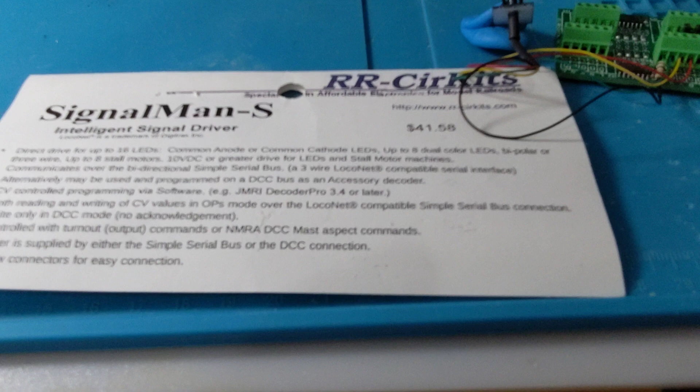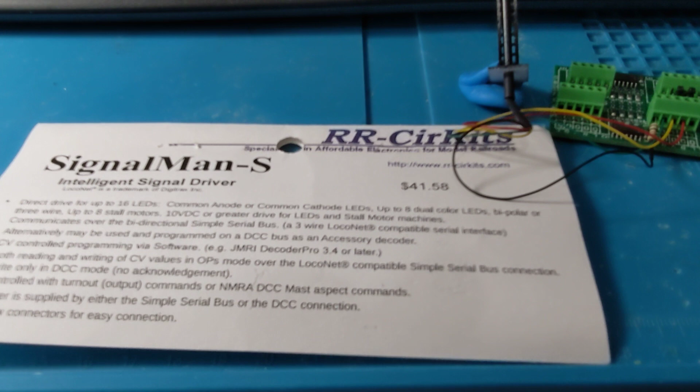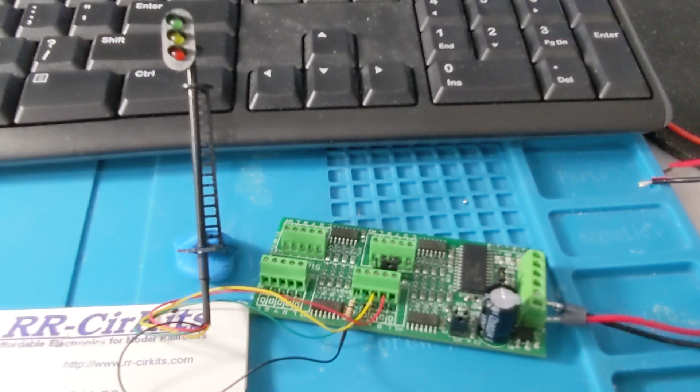Today I'm going to show you how to set up an RR-CirKits SignalMan-S using a DR5000. So I've got my Signalman all connected up. You open up DecoderPro from JMRI and you turn on the power. You get your green light, you watch your LEDs flash, and you know it's operating.

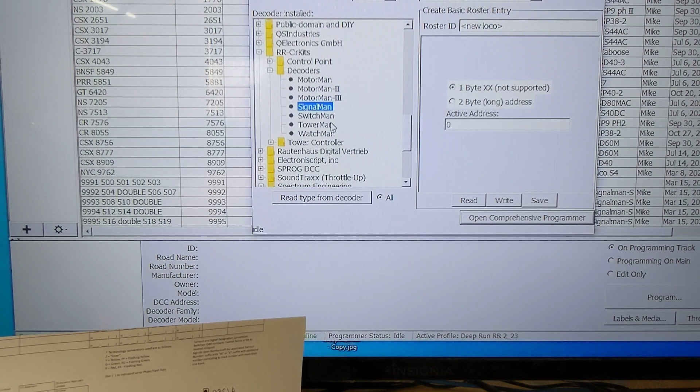Then you turn on JMRI and you add a new loco. And then you scroll down to RR-CirKits right here. You select decoders, and there's the Signalman. All right. What that does is it'll load in the RR-CirKits basic Signalman

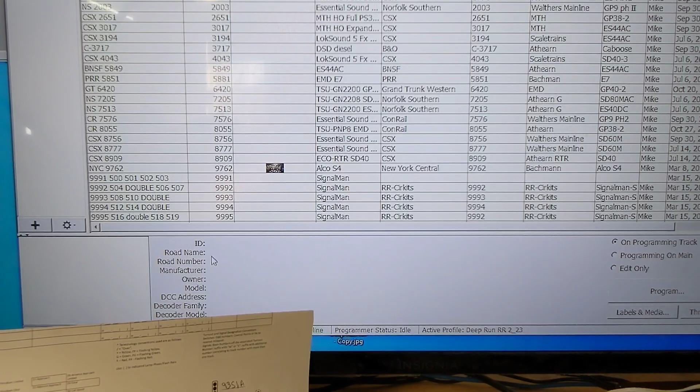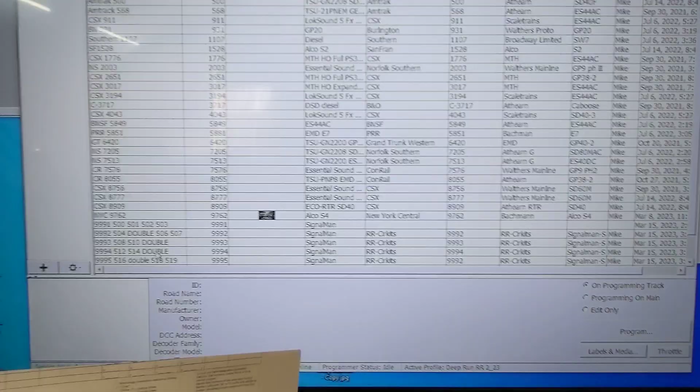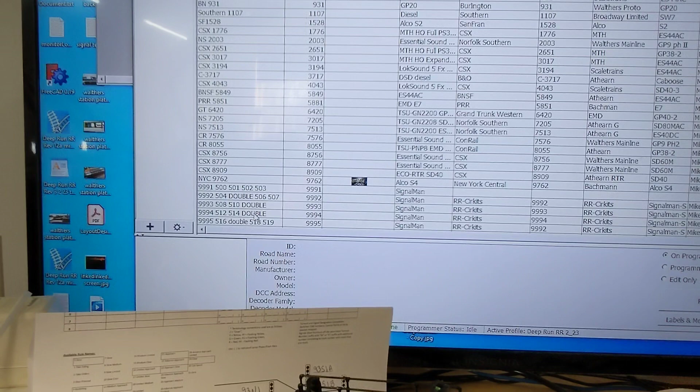identification and decoder information. To program a new one, once you get that template done, the default, you have three modes that you could choose from or set up. You can set up all single signals, two doubles, or a double and two singles. So for this one, I want to set it up as two doubles. So here's two doubles that I've already created.

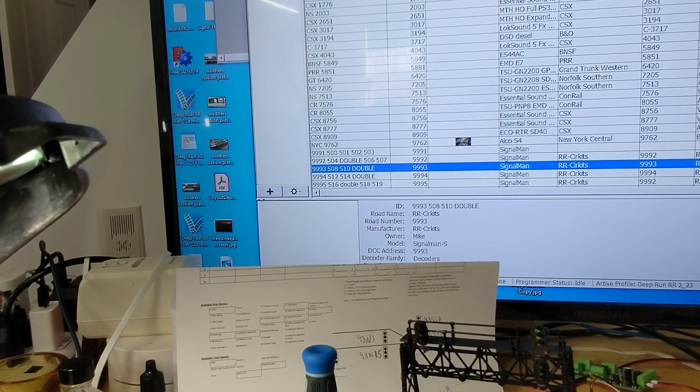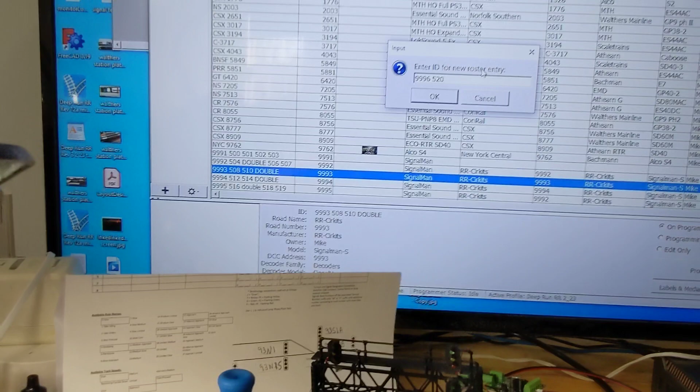So I'm going to click one, go up here to File or Edit, duplicate loco, and it's going to ask me for a roster entry ID. Now I'm up to 9995. I'm going to do 9996, and I also have put in the turnout numbers that I'm going to use to address this module. So let's see, the last ones I used was 519, so we're going to go 520 and 522. Since we're doing double aspects, you have to use two headers. So I'm going to get two double signals on this one board.

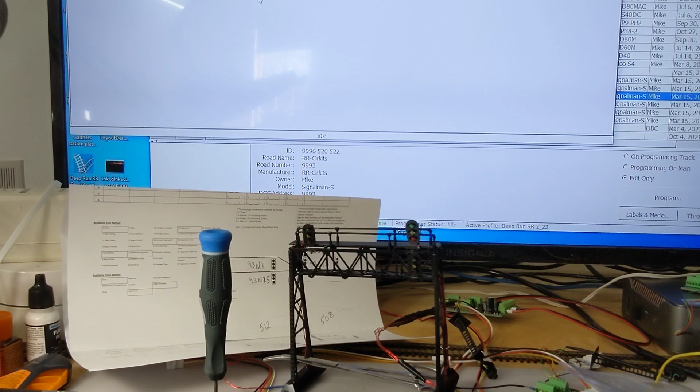All right, so now if I go in and edit the one I just created, if I can find it, there it is. You edit only, go into program, and you go into basic, and you need to change it to its new address here, 9996, okay? And then you go over to the CVs, and you see that 17 and 18 have been updated to the new address.

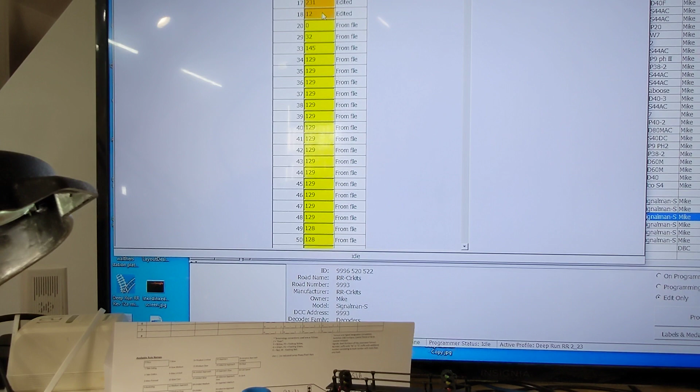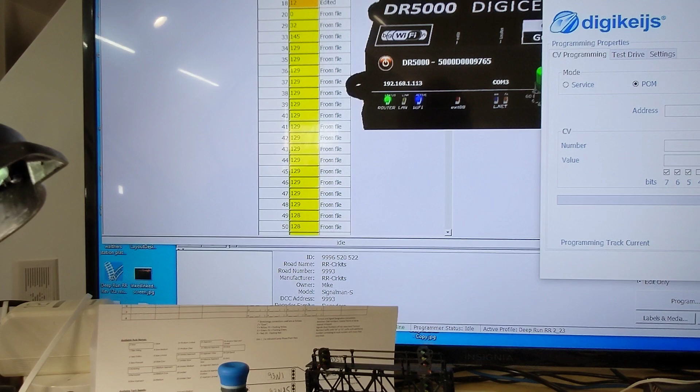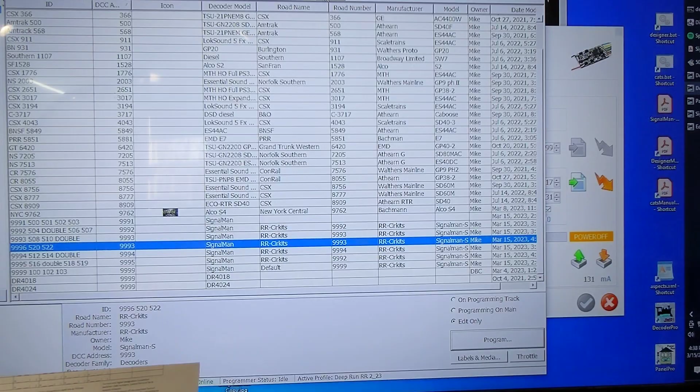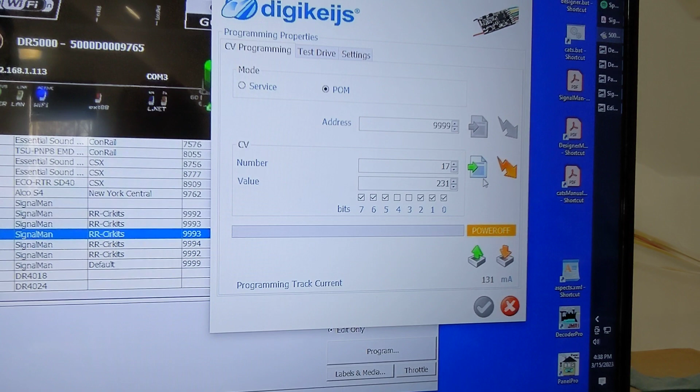So you go over to your Digikeijs DR5000, you open up the program track. Here's DR5000. Open up the program track. You come down here and you use 9999, and then you write the CVs. So 17 is 231. You write that. Oops, tells me my power's off. Okay, let me go turn the power on. Okay, we've finished our boot up on the card. Write CV 17. Oh, we got a nice ding.

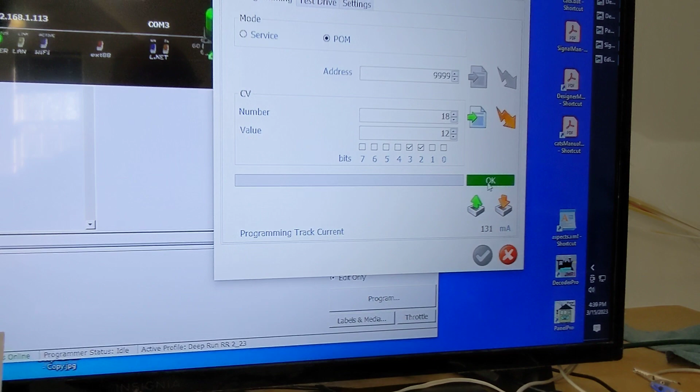Now, back on the CV page, CV18 is going to be 12. And then you write that. All right, okay. So now, the Signalman will not operate on the information programmed to it until you boot it. So we'll go in here and boot it and boot back, or power off and power on.

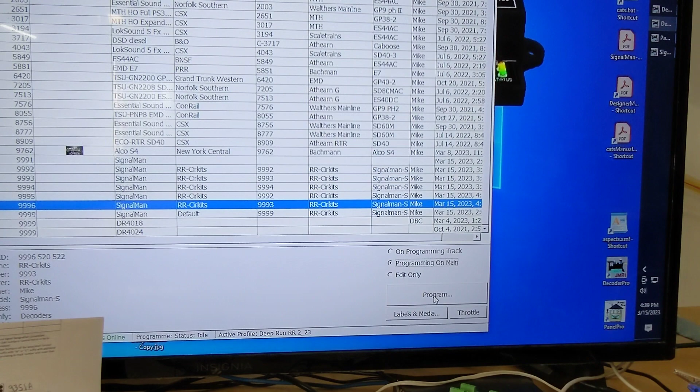You have to reload the DecoderPro panel. So you save it, and you click off, you go over here, you find your new one, there it is. Gonna do program on the main, program, bring up your decoder file.

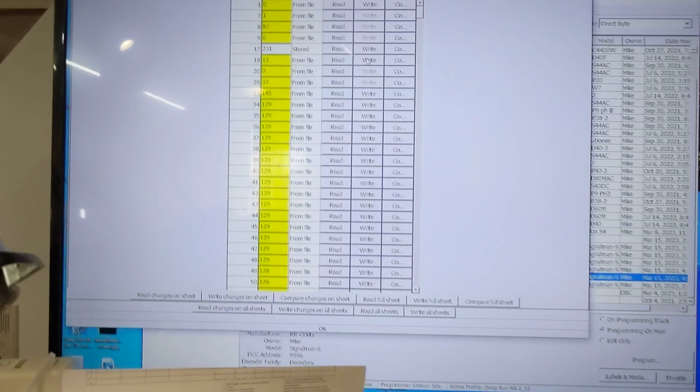You want to do the addressing with the Signalman on your bench. You don't want to have any other Signalman in the circuit, because if you write any CVs using the address 9999, it will rewrite all of them. So that's kind of a pain, but I can't figure out a better way to do it. So now I'm over here, and I'm gonna just double write the address file. So write, and I get an OK, write, and I get an OK.

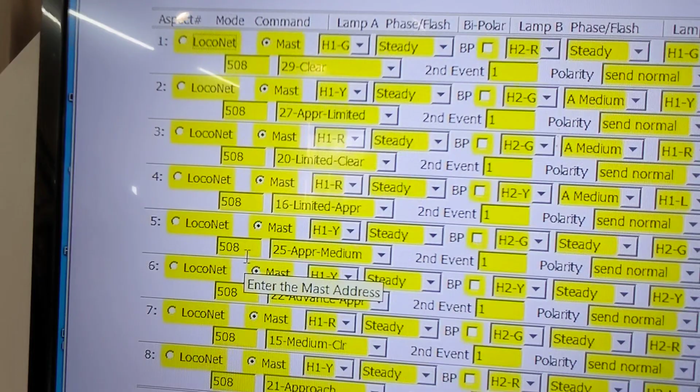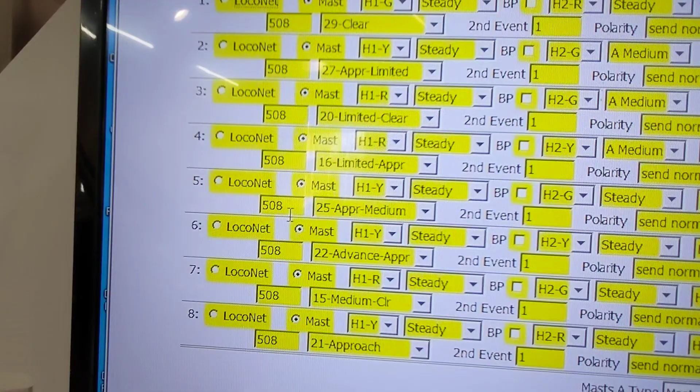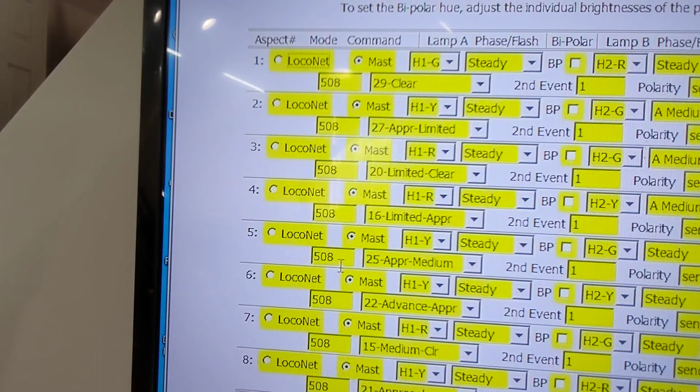Okay, now here's the mast, and what you can see up here is that those are the addresses of the mast from the copied signal mast. The main reason to copy it is that you get all these aspects copied over, and then you just need to change the address for this turnout. In our case, it'll be 520 instead of 508.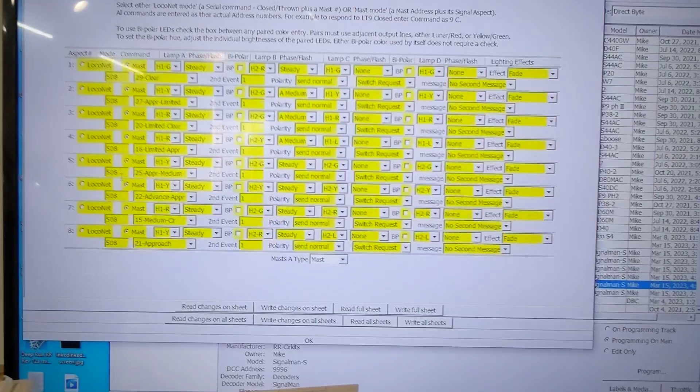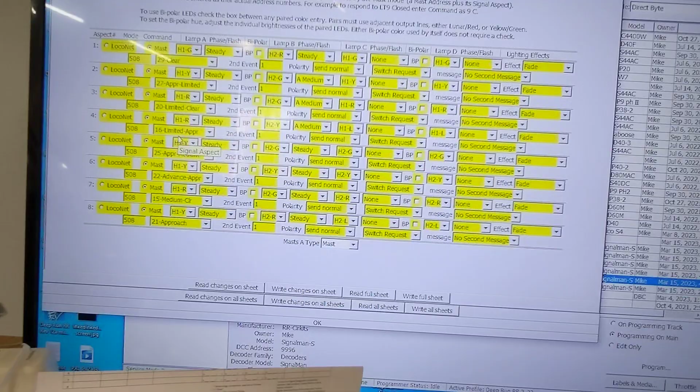All these aspects are defined in the Signalman user's manual, and I just copied them right over into JMRI and updated each profile to the 3 different configurations I mentioned: the double, the double 2 singles, and the 4 singles. Then I have all the configurations, and all I have to do is go back in and change the track or the turnout number.

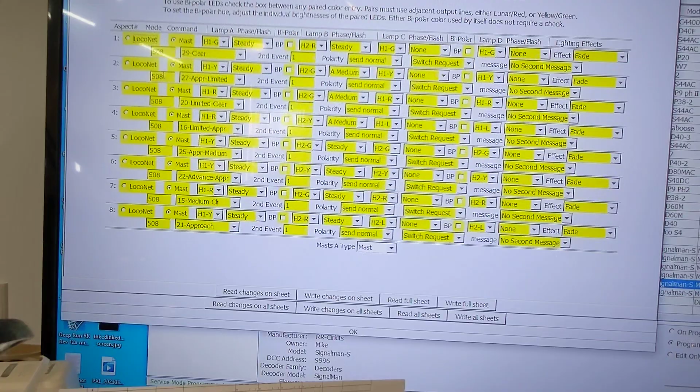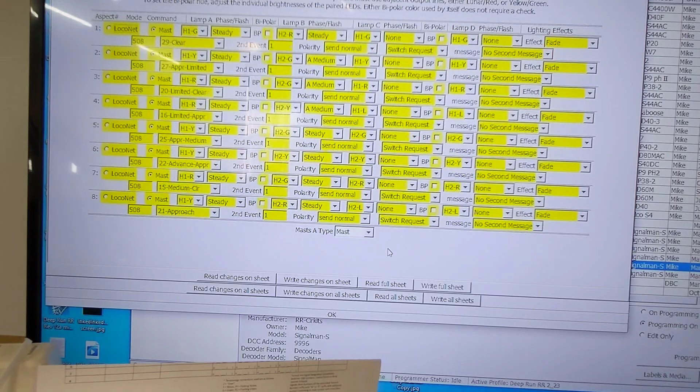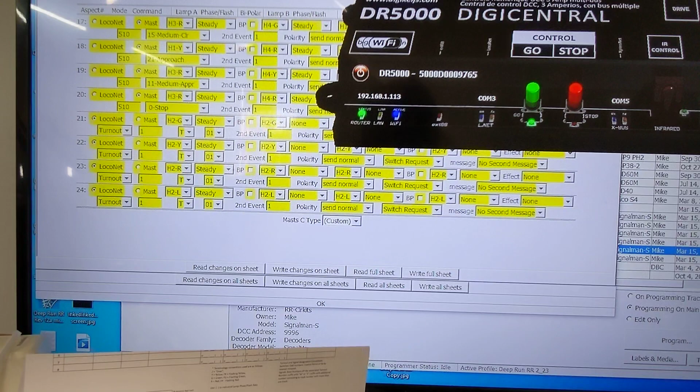So I don't know how to put videos together yet, so I'm not going to do this, but it's simply, once you change all the turnout addresses, and you can use multiple masts. So we're going to use up to 3 masts to get all the addresses and all the aspects. But the key thing was using the programming track CV writer to get the address changed to what you want it. For some reason, I could not get JMRI to change the address.